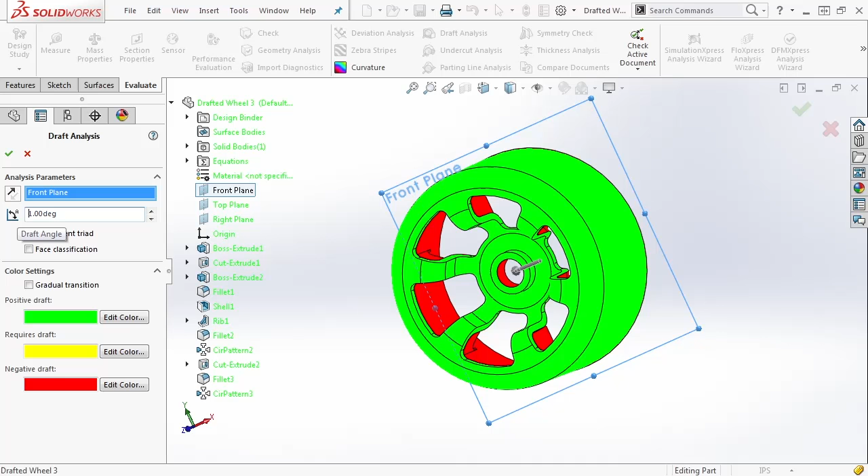The first thing we want to do is go to Draft Analysis. We're going to select the plane that we want to pull from, in this case the front plane, and we're going to select the draft angle. Now we want to say a minimum of 1 degree. So as we're looking at this part, you can see that we have green faces and red faces.

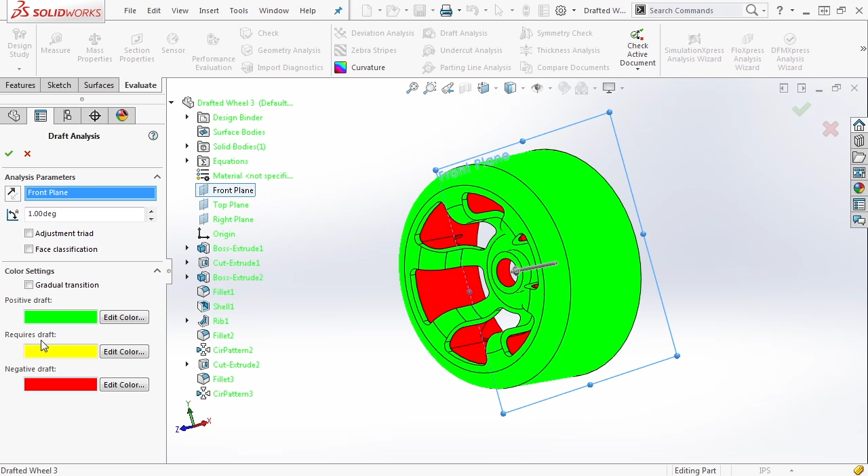Now there's a color settings section in the bottom of the window, and you'll notice that we also have gradual transition. Gradual transition is great for very complex outside shapes that might go from positive to negative draft. But for a simple part like this, we want to make sure that we leave positive, negative, and requires draft as 3 separate colors with no transition between them. We can go ahead and select OK, and this will stay on.

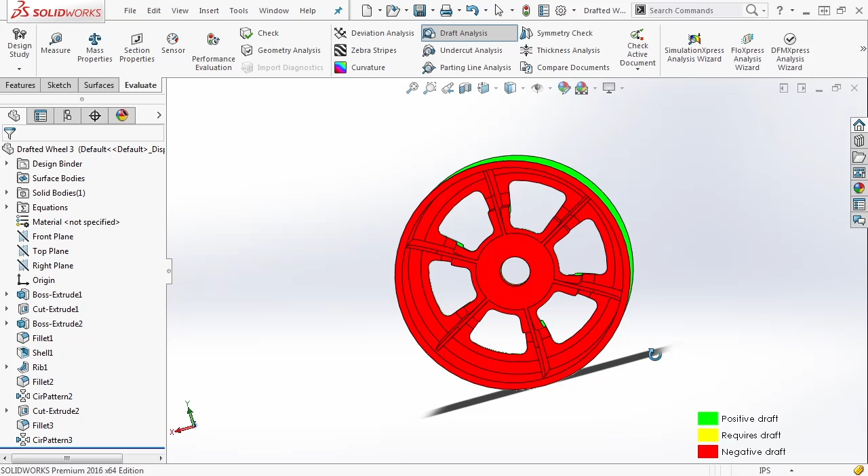You'll notice that you have a color bar key in the bottom right-hand section, and you'll also notice that in your Evaluate tab, Draft Analysis is now a depressed button. If we select that, it'll turn the colors off and you'll go back to your gray shaded model. So as we look at this, the important things to note are the red colored areas are all on the same side. So that means anything in red has a draft angle that can be pulled from the back side. Anything in green has a draft angle that can be pulled from the front side.

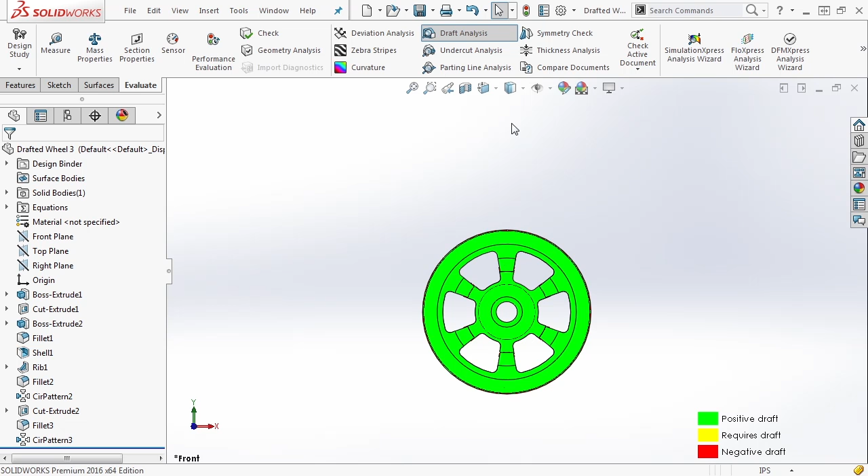As we look at this, you want to make sure that you don't see any red. Anything you see should have green on it. So as we look at it, everything is fine from this view. We turn it around, everything is fine from this view. Now, again, you want to rotate it around, and the big areas we'd be concerned with are faces like this, which might have an undercut or an occlusion.

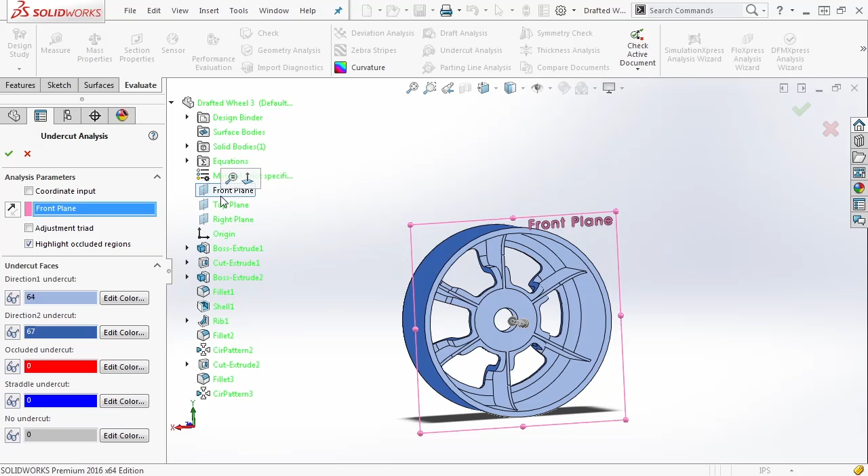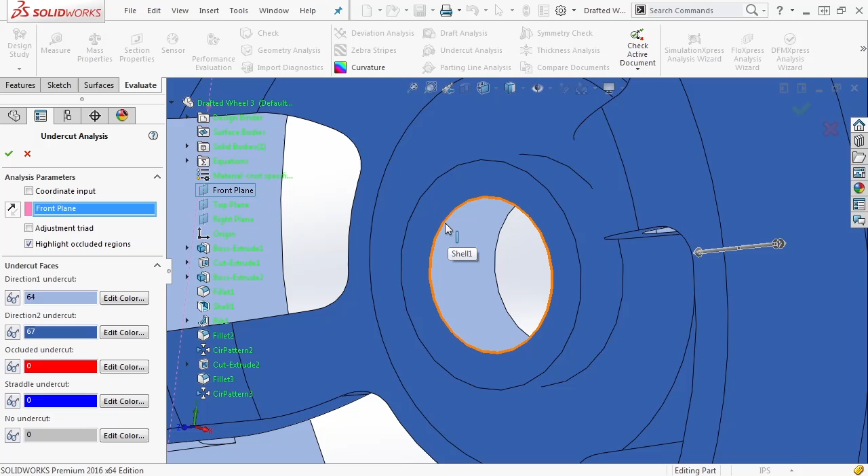All right, let's go ahead and turn draft analysis off, and let's focus on undercut analysis. Undercut analysis will again use the front plane and take a look at everything that we have here. You'll notice that with this tool active, on the left-hand side, we have direction 1 undercuts 64. Direction 1 is giving us this lighter blue color. Direction 2, 67, which are the darker blue on the outside, and everything looks fine. All the color transitions happen at a sharp edge, or really this is going to be a parting line edge, and you'll notice that there's no occluded or straddle regions.

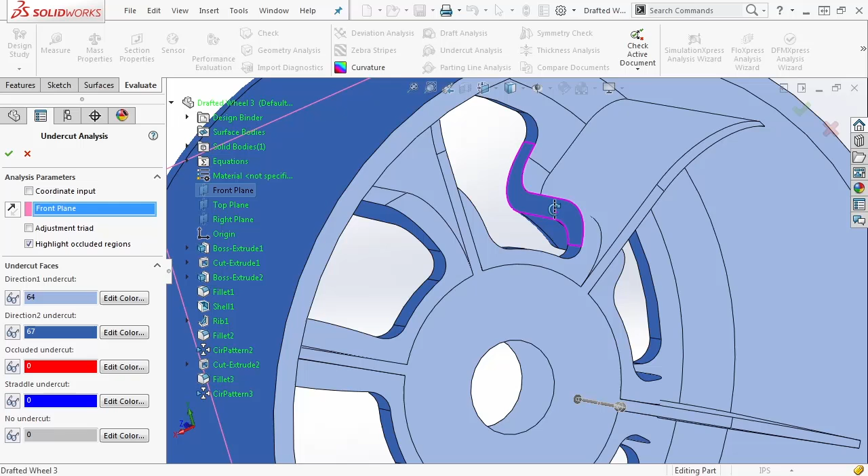Now these are the regions where you would potentially run into problems. If these edges, for instance, had a negative draft and then a positive draft, you'd have an area of occlusion that couldn't be pulled with a straight pull mold. You'd need to have some sort of sliding core, some additional functionality. Now, for a simple part like this, if you can get around that from a design standpoint, if you don't need to have those faces go into an undercut or an occluded area, then by all means avoid it. Now, this is a good final test to make sure you didn't accidentally make a mistake during the design process.

We know so far that using draft analysis and undercut analysis that everything is fine with our part. We don't have any areas where we need to have additional draft. We don't have any areas that we have an undercut or an occlusion that we need to go back to the design and redesign or change anything. Now, the reason that we know that everything is designed properly is because we used the most basic process. We did an original extruded boss. We used draft that was set up in our equation manager with a global variable.

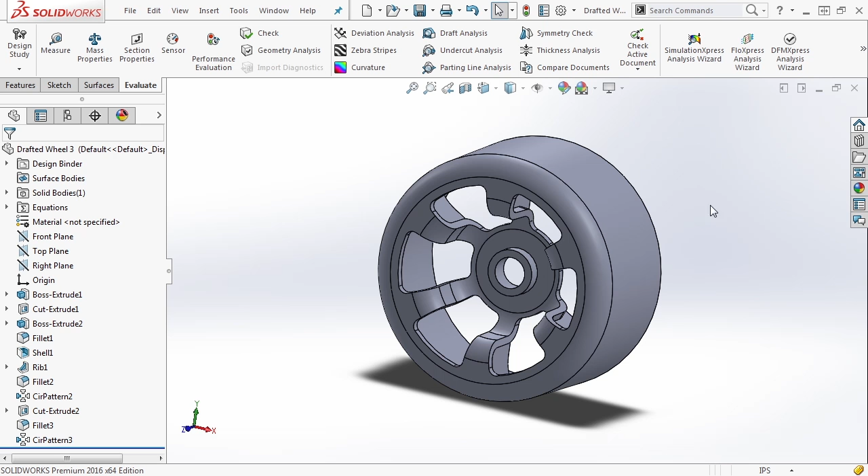And any cut that we did or addition that we did after that, we made sure that we used the draft tool so everything had draft. Fillets were added after the fact, so they wouldn't have changed anything in terms of the draft angles. We shelled the part, so we know that any draft that was on the outside is also on the inside. So we didn't have to worry about any undercuts or occlusions because of tools like thin extrude or anything like that. Then we added a rib. We also made sure that we added draft to that rib when it was done. Again, fillets were added that don't affect the draft because they were done after the fact.

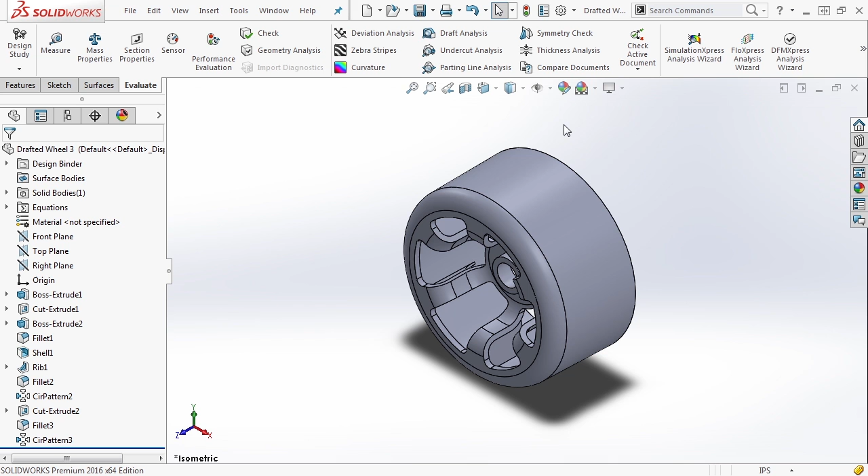And then we patterned and cut features, again, with draft on them to make sure that they were going the appropriate direction. So at this point in time, our part is now completed. We made sure that everything was done. We can go ahead and save it just to be sure. And we've completed our first drafted or molded part.